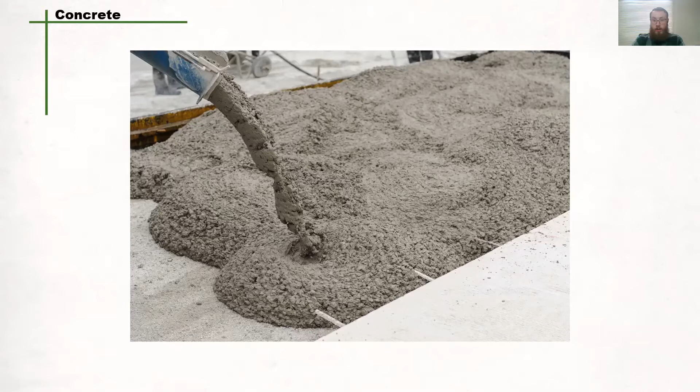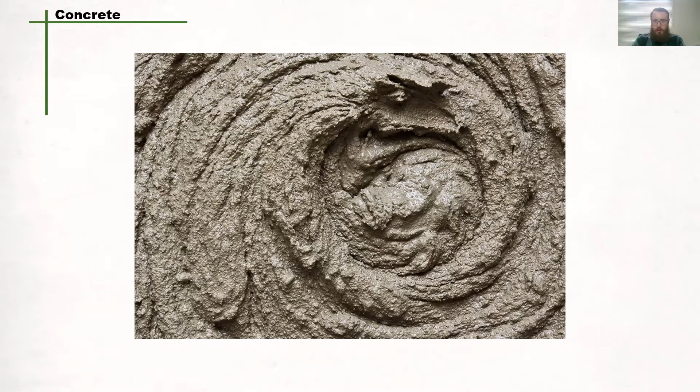Cement is a widely used building material, whether you use it on the job, have cement work done at your home, or are planning a do-it-yourself project. It's important to know what cement can do if you come into contact with it. Concrete pours thick and cool, like a mud milkshake. On a hot day it may seem inviting, as more than one homeowner has stepped in, shoeless, to level the surface of a driveway. The idea that this seemingly harmless substance could cause severe burns runs counter to common perception.

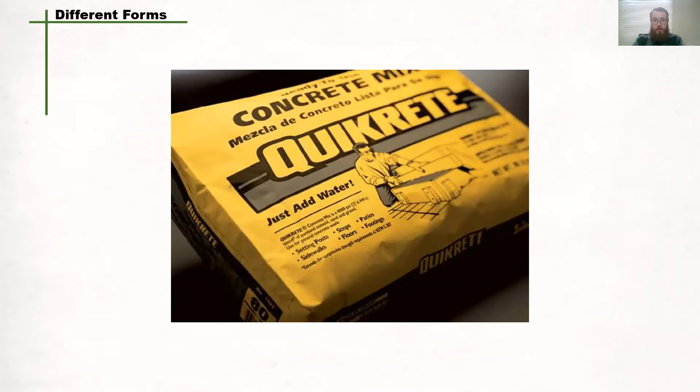Cement is available in many different products for commercial and home use. It comes in a pure powder form, a bag of strictly Portland cement, or in pre-mixed forms such as concrete and grout, or Quikrete. These different cement products have specific purposes - for example, you'd use grout to fill spaces between tiles, and mortar to bond bricks together.

A story from the workplace from 2007 of a mason worker shows just how dangerous concrete against your skin can be. He was working a slip form concrete pour for a grain storage silo, a 24-hour operation that would take roughly 16 days to complete. It involved cement masons, iron workers, laborers, concrete truck drivers, and concrete pump operators.

He was halfway through his 12-hour shift when it started to rain. The concrete pour continued, of course, and the rain continued throughout the next six hours. He finished his shift soaked to the skin. Unfortunately, the concrete had also soaked through his clothing, working its way through to his hands, arms, knees, and ankles.

Hours after leaving the job, his skin started to peel off his arms and legs. To quote the individual, it felt like the worst sunburn he had ever had. Other workers experienced similar problems, and one iron worker even went to the hospital emergency room, where health professionals applied an ointment that made the burn even worse.

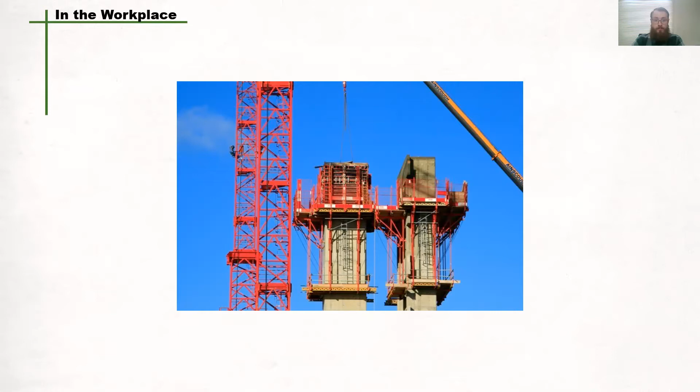Dry cement is abrasive, but no more so than similar materials. It's wet cement that can cause chemical burns on the skin. When water is added to cement, relatively harmless calcium oxide becomes calcium hydroxide, which has a pH of around 12 to 14, so it's very caustic. While momentary contact with unbroken skin is unlikely to cause harm - after all, children have been putting handprints in wet concrete for ages - extended contact makes it much more likely that a burn will occur.

This slow forming injury means that by the time symptoms appear, many people no longer associate the injury with wet cement. This leads to misdiagnosis and mistreatment that can make the problem worse, just like in the case of the iron worker we spoke about earlier.

Some of the worst outcomes occur when cement gets into or seeps through boots, gloves, or clothing. By the time the person is aware of this, significant burns to the skin could have already occurred. The longer the cement stays on the skin, the more damaging the burn can be. Even after washing the cement off, the alkaline burn usually gets worse before it gets better.

Concrete is highly caustic and works slowly, so a burn can develop over hours or even days. Left unattended, a concrete burn could blister, swell, ooze, and bleed. In fact, second or third degree burns may occur after short exposures. In severe cases, burns can go down to the bone, leaving disfiguring scars or disability. Skin grafts are not uncommon, and skin and tissue damage can be so severe as to require limb amputation.

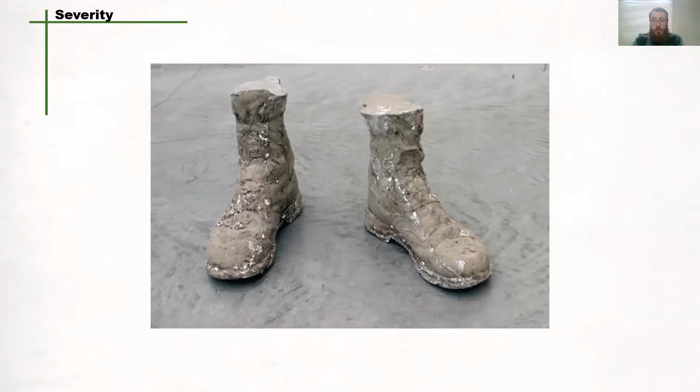So we ask ourselves, how could something as non-threatening as concrete or cement result in amputation? Well, it really comes down to three factors: number one, the abrasive nature of concrete and cement; number two, its high pH levels; and number three, its stew of sensitizing chemicals and metals.

That Portland cement, which is in concrete and many other products, contributes to concrete burns and other skin problems. It often contains the metal hexavalent chromium, a toxic form of the element chromium that causes severe skin problems in some workers.

Because concrete and Portland cement are abrasive, they cause micro cuts, really tiny scrapes and cuts to the skin. Portland cement is highly alkaline or caustic, and it can actually absorb moisture from the skin, leaving it dry and red.

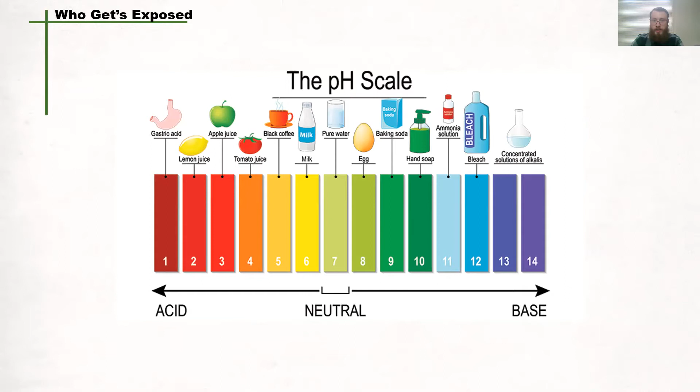To realize just how foreign Portland cement is to the body, consider that water has a pH of 7, or neutral, but human skin is acidic and has a pH of about 5.5. Vinegar, a weak acid, has a pH of about 3.5, while battery acid or sulfuric acid has a pH of 1. Strong alkalis have pH values between 12 and 14, and wet cement is near the top of the charts with a pH that ranges from 12 to 14.

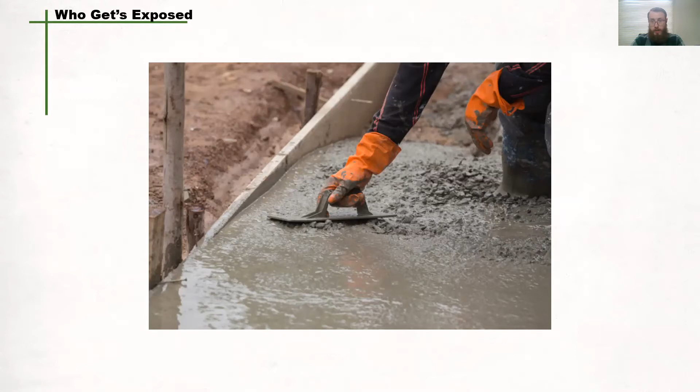For people working in or around concrete or other products with Portland cement, such as fresh mortar and grout, the damage is not always a burn. Skin problems range from mild itching and scaling to a disabling immune response skin condition that forces many workers to change jobs. These skin problems can be short-lived or persistent. They can occur after single exposure or after multiple exposures, and medical tests cannot predict who will get skin problems from concrete.

The list of construction tasks exposing workers to Portland cement is vast. Some tasks are mixing and spreading grout, terrazzo work, hosing out concrete trucks, using mortar to set brick and block, mixing mortar, dismantling formwork contaminated by Portland cement, leveling and finishing concrete, mixing and applying plaster and stucco, spraying Portland cement products such as fireproofing or shotcrete, and grinding finished concrete or tuck pointing brick mortar. Clearly, hundreds of thousands of construction workers are exposed to the hazards of Portland cement products.

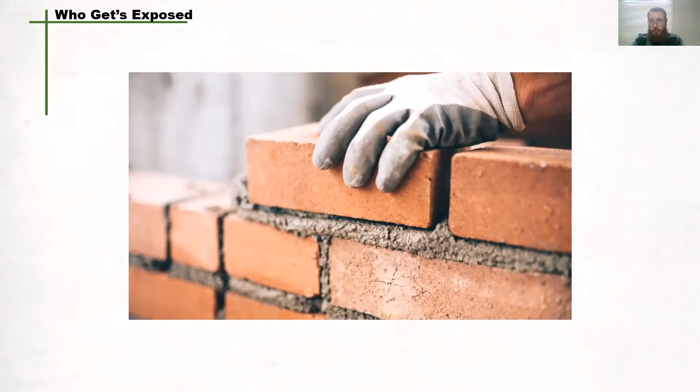Concrete burns require immediate medical attention. While in transit, many medical professionals advise flushing the skin with lots of clean water. Some medical experts recommend adding vinegar or citrus to the water to neutralize the caustic effect. Upon locating a medical professional, he or she should be told that the problem is a caustic burn from cement, because that burn can look like a standard trauma burn. The skin blisters or is dead or hardened. It may even turn black and green. But treating a concrete burn with ointments that would soothe a normal burn more than likely will trap corrosive materials against the skin, which makes the condition worse.

These skin problems also have a cost in worker productivity. Concrete workers have 4 times more lost work days for skin problems than do all other construction workers. Lost days, pain, and even hospitalization can be avoided by following safety guidelines. Workers, worksite supervisors, and employers all play a role in job site safety and worker health.

So some tips to protect yourself as a worker: wash your hands before applying gloves. If your hands have concrete dust or irritating compounds on them, putting on gloves traps those contaminants against your skin. One study found that wearing gloves without first cleaning the hands is as damaging as working without gloves.

Use a pH neutral soap and clean nail beds. Ask your pharmacist to suggest a pH neutral soap or cleanser to use both at home and work. As an FYI, most liquid hand soaps are pH neutral. Wash and dry your hands several times a day using a pH neutral soap and water. Wash before eating, taking a break, when you stop work, and whenever you remove your gloves.

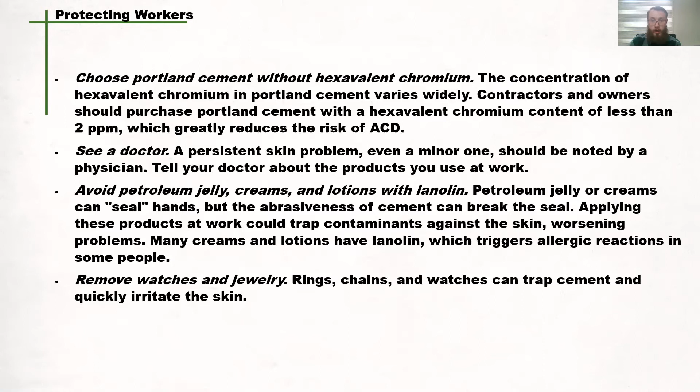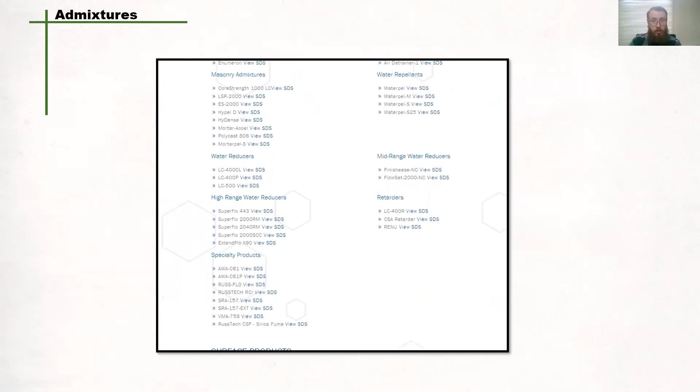So we have a safety data sheet here for admixtures. Admixtures are added to the concrete batch immediately before or during the mixing of the concrete. Concrete admixtures can improve concrete quality, manageability, acceleration, or retardation of setting time. Among other properties, they could be altered to get specific results. Many, not to say all, concrete mixes today contain one or more concrete admixtures that will help your pouring process, driving down cost while increasing productivity. This makes it important to understand not only the health effects of concrete, but in the admixtures as well.

So we have some admixtures here, some accelerator, air entrainment, and flowable fill. As you can see here, there are 3 admixtures and their health effects from the SDS sheets. When ordering concrete from the batch plant, they will ask what admixtures are required. Ask them where to find their specific SDS sheets for their products they are sending. They may be able to send them with the driver or direct you to their webpage or a supplier page to review them and print them off for your own records.

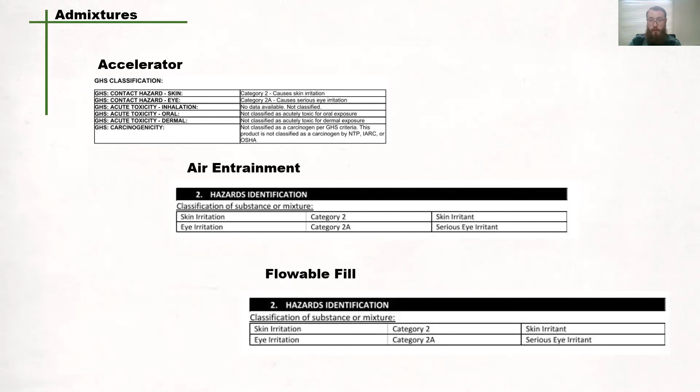So when wet concrete touches healthy skin for a brief moment and then is washed off, there is typically no reaction. Serious burns tend to occur when concrete is trapped against the skin for a longer period of time, often underneath clothing. Ironically enough, many concrete burns occur when an individual is actually wearing protective gear, but the gear is not appropriate for the job, it's worn out, or it's worn incorrectly.

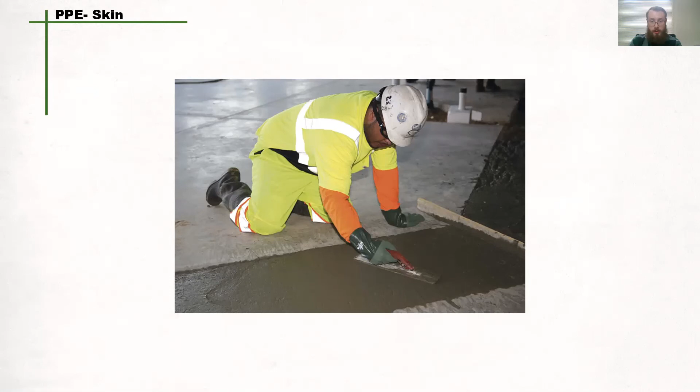So a good practice here, wear long sleeves and pants when working with concrete, and they should be tucked correctly into gloves and boots. Make sure that boots are waterproof, they are in good repair, and at least as high as the concrete is deep. Gloves should be waterproof and alkali resistant. Keep all protective gear that has come into contact with concrete separate from everyday clothes, upholstery, etc. And if you are kneeling on or near concrete, use knee pads or something to create a barrier between your knees and the concrete itself.

Now, while concrete burns may take hours to develop on most exposed skin, the eyes are extremely sensitive. Serious damage can occur in a very short amount of time. So make sure you always wear your eye protection when working with wet cement, and always know where you can flush your eyes in case contact does occur. Flush with clean, cool water for 20 minutes and call 911 immediately.

So some things to ask: has everyone been trained in working safely with and around concrete? This includes apprentices and new workers, as well as those not working directly with concrete, but who will be in the area. Does everyone have the appropriate safety equipment? Does it fit correctly? Are there spares on hand in case someone's gear becomes contaminated? Are there appropriate first aid supplies on hand to deal with potential concrete injuries? This includes pH neutral soap, clean towels, and several gallons of clean water for flushing.

Are the people on site trained in responding to concrete specific injuries? Generally, first aid training will often cover treatment for thermal burns, but not chemical burns. Responding incorrectly to an injury can lead to further injuries that might otherwise have been less serious.

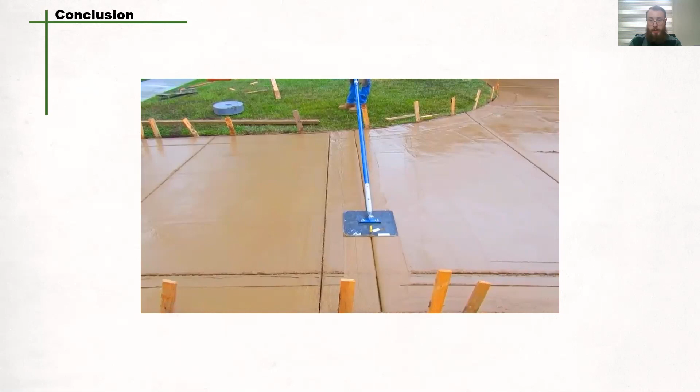So taking the time to go through and make sure you have the right equipment, the right knowledge, and the right people increase the chances you will never have to deal with serious illness or concrete-related injuries. Rushing through safety checks and trainings might save a few minutes here and there, but this can lead to lost time and productivity in the long run, as well as damaging your reputation as a responsible provider of construction services.

So that concludes the toolbox talk for today.